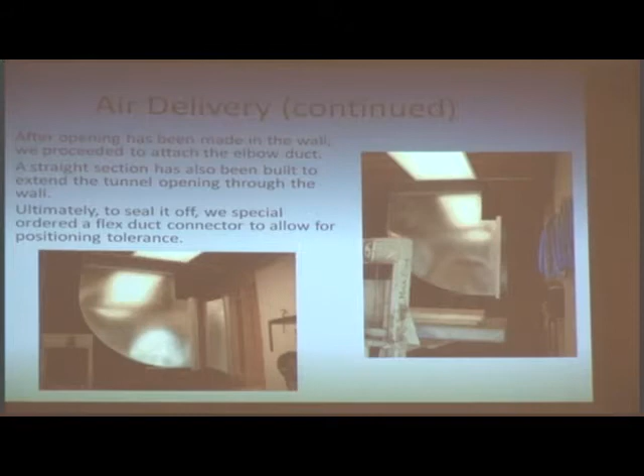Now, after we opened the hole in the wall, we proceeded to attach the elbow duct. This elbow duct was pretty tough to attach. It's heavy, I think it's like 500 pounds, so we had 4 guys holding it up.

We used a jack bolt underneath there to support the weight, and we bolted it in towards the top. Towards the end, to ultimately seal it off, we had the special order flex duct connector. You'll see it right here.

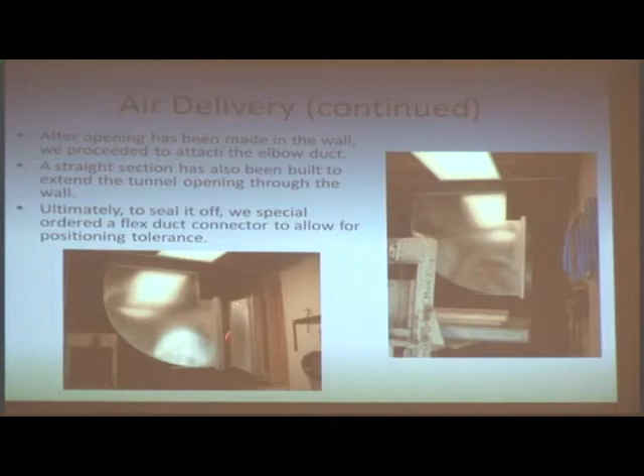That's the flex connector. It allows you to take your original size and expand it to the dimension of that. It also allows for positioning tolerance - basically, you can shift it around and have a little jiggle room to work with.

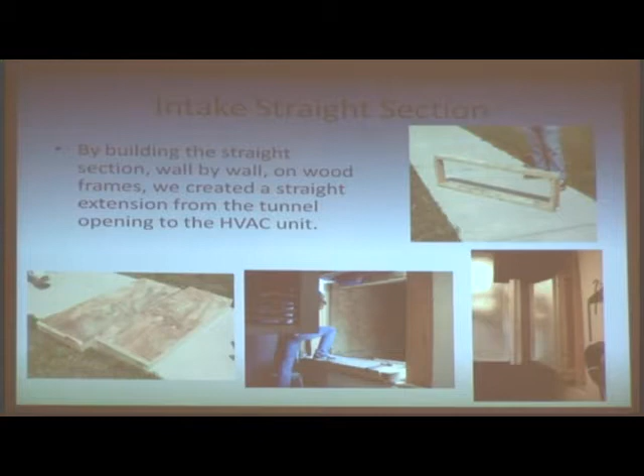Now, the intake straight section. We built the intake straight section by wall on wooden frames. And the wooden frames you'll see right here, we created an extension from the tunnel to the HVAC unit. So we made these walls or these little assemblies, and we have 4 of these.

So we put one here, one here, one here, one here. We'll bolt it up, seal it up with silicone, and once we have that straight section done, we're able to attach this flex connector.

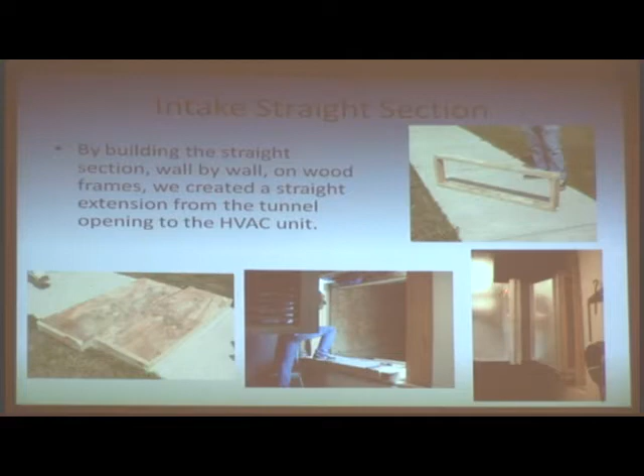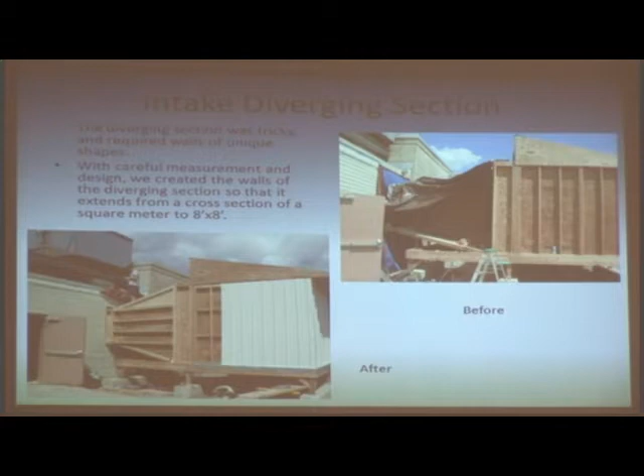Now the intake diverging section. Earlier I was talking about the intake straight section - this is the diverging section that comes right after it. The straight section is right inside this wall. Now the diverging section basically diverges the airflow this way.

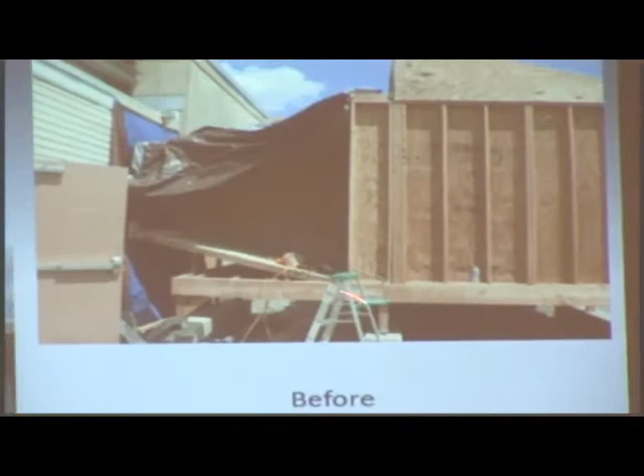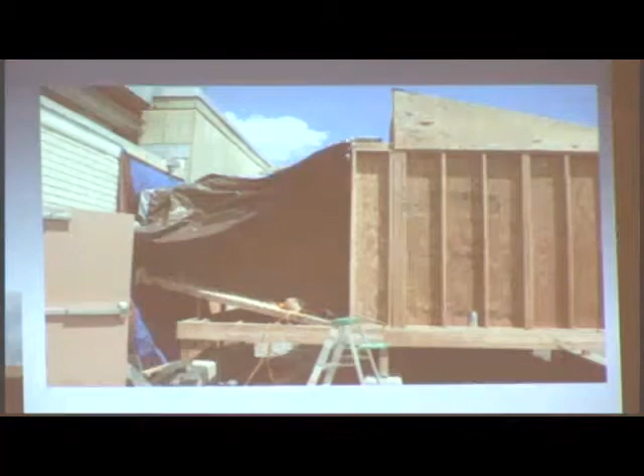It's a little tricky because the walls aren't perfect squares, and we have to cut little triangles matched to the right degree of the right angle. This allowed us to extend from a cross-section of 1 square meter, which was the opening inside here, to an 8x8 opening. I know it's a different change of units, but that's just the way it worked with the HVAC unit and the wood. So we expanded from a square meter to an 8x8 opening.

Now, to turn airflow, I mentioned earlier that we use turning vanes. Whenever the wind tunnel makes a turn, such as at a corner, especially a 90-degree corner, the airflow can get extremely messy and cause a lot of turbulence.

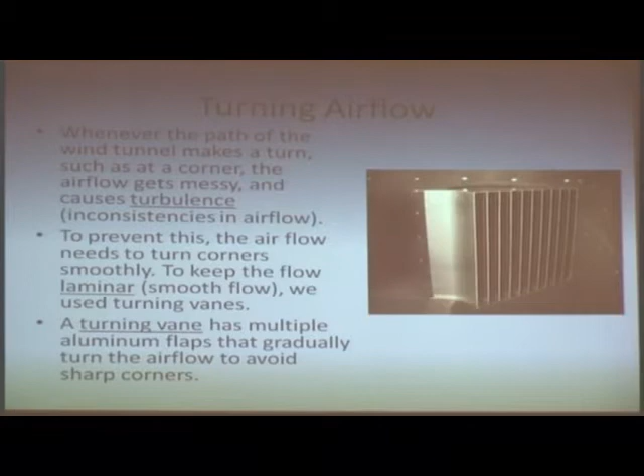That's when the airflow travels along a path, then when it's about to hit a corner, it just bounces off as it tries to turn. That causes a lot of turbulence, and we want to prevent that in order to have smooth flow. We want to turn the corner smoothly and keep the flow laminar - by laminar, that's a vocabulary word meaning smooth flow. To do that, we use turning vanes.

These are turning vanes. They're custom made. These turning vanes have multiple aluminum flaps that gradually - if you see the curve here - gradually turn the airflow to avoid sharp corners.

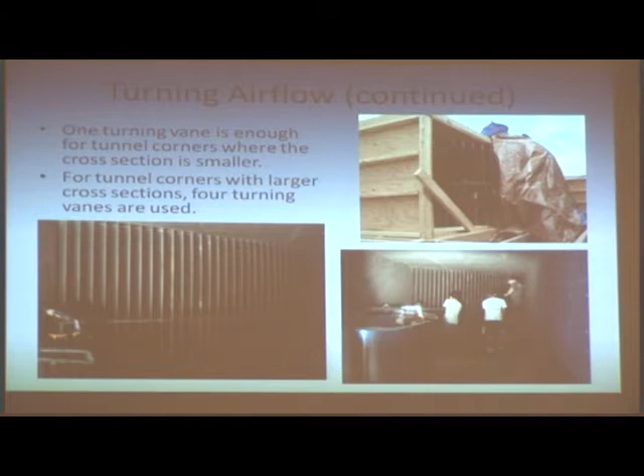Now, this turning vane is used in multiple corners of our wind tunnel. In this case, this is a smaller section of the wind tunnel. We have diverging sections, contracting sections, and certain parts of our tunnel are smaller in cross-section and some are larger. On the smaller contraction, on the smaller tunnels, in the corners, we're able to use only one. That's enough to turn the airflow around.

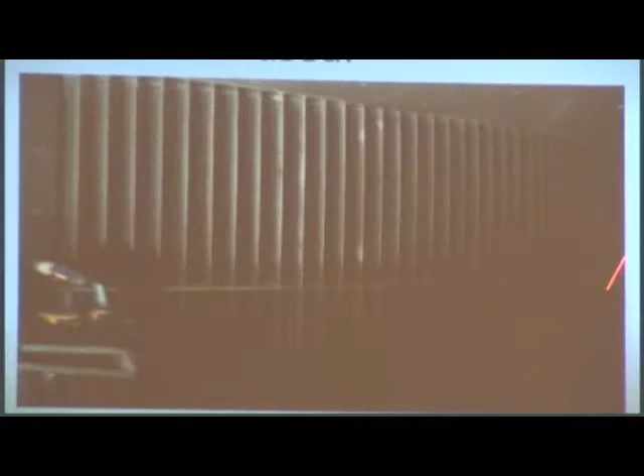Now, in large sections like the 8x8 that I mentioned earlier, we put the turning vanes in a stack of 4. So we have to secure it down with bolts and screws, and that's how we bolt it down.

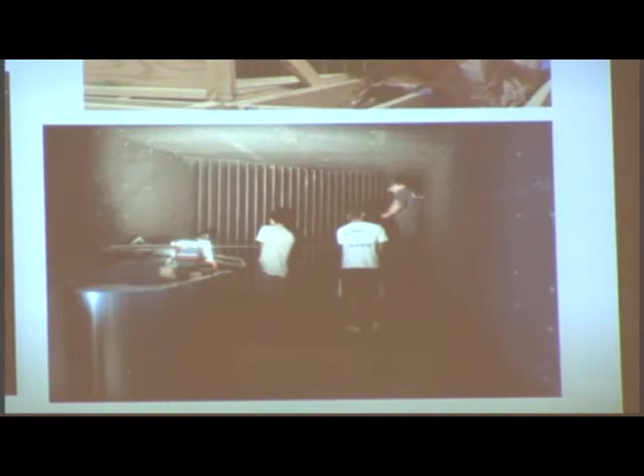Now, one thing about the airflow is that when you're running a test, you want to have clean airflow. You want it to be clean because you want it to be laminar or smooth. In order for it to be laminar, you have to minimize your flow turbulence.

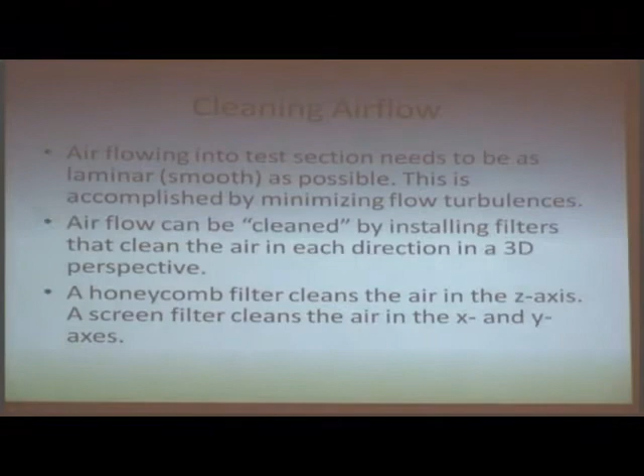You clean this airflow by installing filters that clean the air in each direction in a 3D perspective. By 3D perspective, I mean that if airflow is coming this way, you might have some turbulence that's just floating around, and you want to be able to clean it this way and this way. So you use a honeycomb filter or a screen filter or both. A honeycomb filter cleans the air in the z-axis, while a screen filter cleans the air in the x and y-axis.

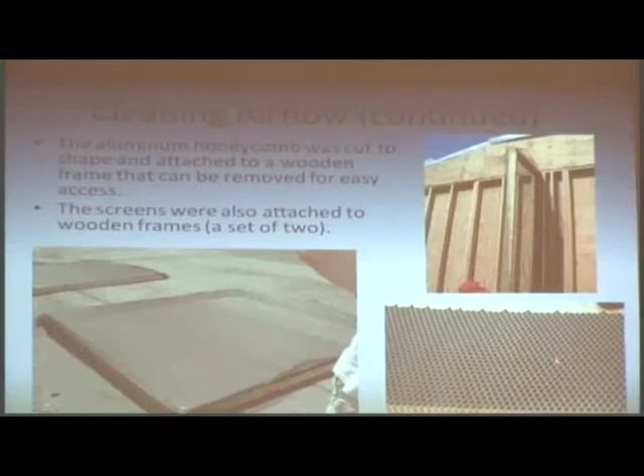Now, cleaning the airflow. I just mentioned honeycomb and screens. A honeycomb is basically an aluminum sheet shaped like a honeycomb, about 5-6 inches thick, and it allows you to put air through it and clean it in a horizontal way.

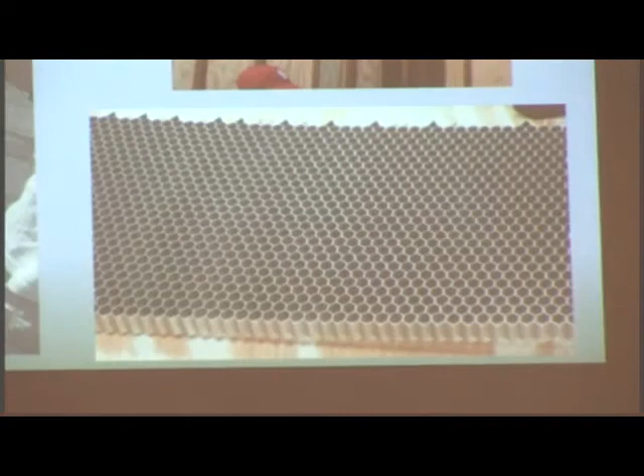The screens are also attached to two frames made together by 2x4 studs, and the honeycomb was also placed on these frames. We were able to slide these into our test section to filter the air before it reaches the test section, before the anechoic wind tunnel chamber.

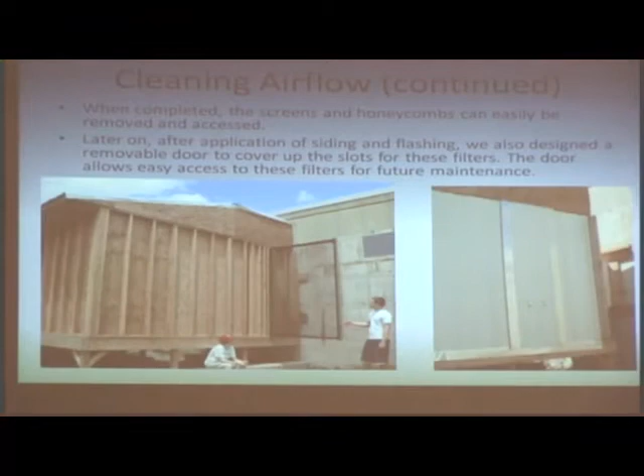Once completed, the screens and honeycombs can be easily removed for maintenance, just by sliding them out. It's a little heavy, but all you have to do is slide it out, change the screens, clean it, whatever you have to do. There's the first screen here, second screen here, and the honeycomb right here. It's a little difficult to see on screen, but it's right there.

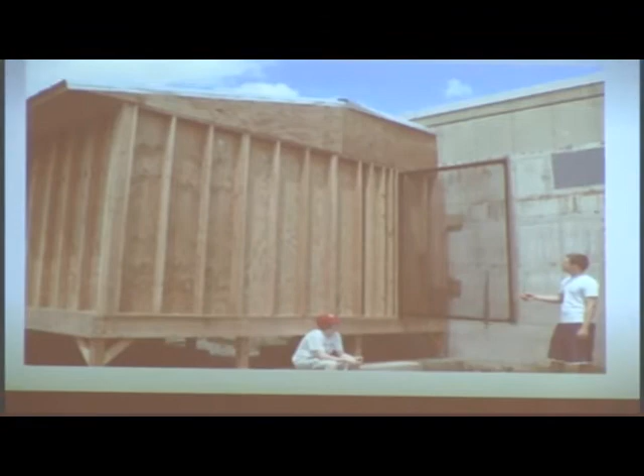Later on, after we put on siding and other stuff like flashing, we made a custom door that allowed us to cover up this hole, which let us waterproof it and protect it from rain and other weather damage. With this door and handles, we can remove it for future maintenance.

For the exhaust section, at the rear end of the wind tunnel, we wanted to design a section that can extend into the fan unit. Earlier I mentioned this is the fan unit - there's a large fan in here and a metal plate here. We wanted to finish extending this inside.

So what we ultimately did was cut it with an abrasive disc and cut a hole in the metal. I don't have any in-progress pictures - I've got to take some - but it ultimately took a few days. The other side is the opening, shown in this picture.

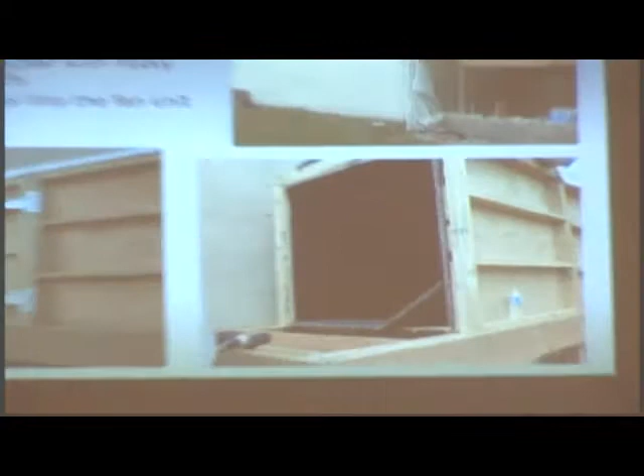Once we completed it, we had a door. We also designed a door that we can just latch, open and close, so we can allow easy access into the fan unit for maintenance.

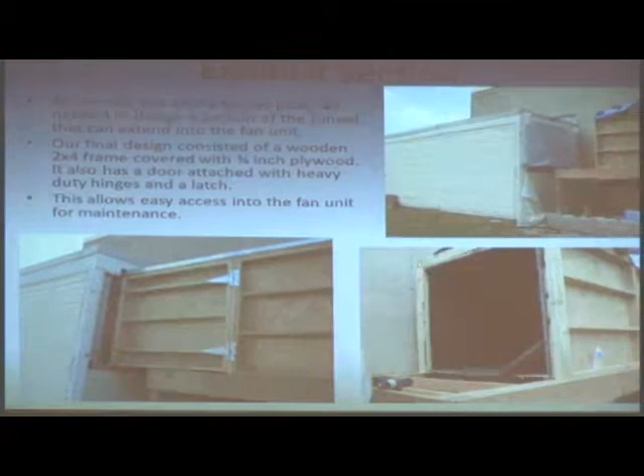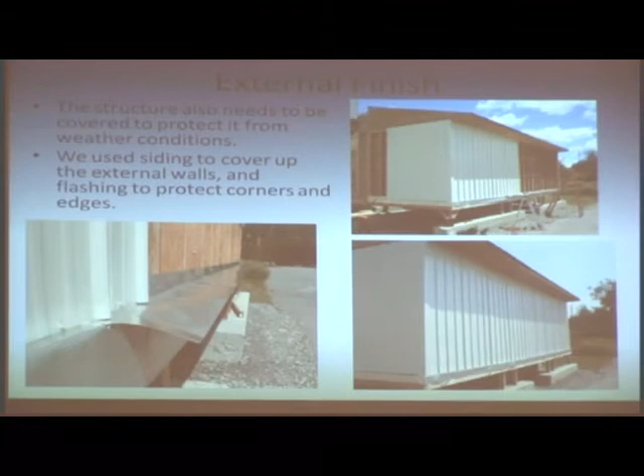Now the external finish. By external finish, I mean protecting the outside structure from weather damage - rain, snow, anything. To do that, we used metal siding to cover the external walls on the outside of the tunnel.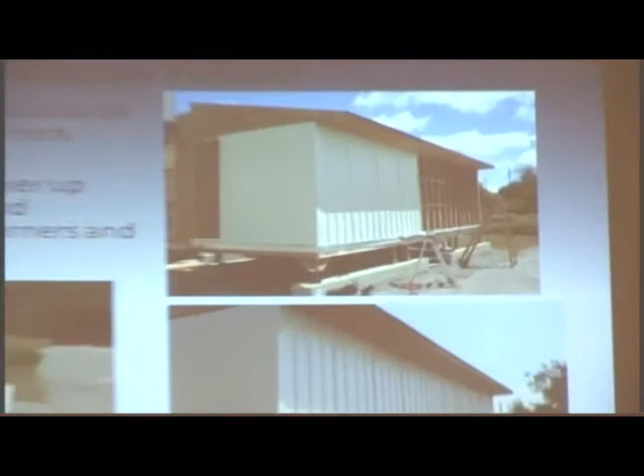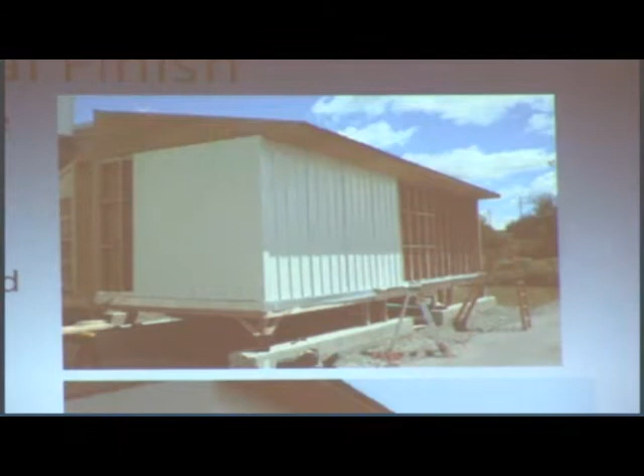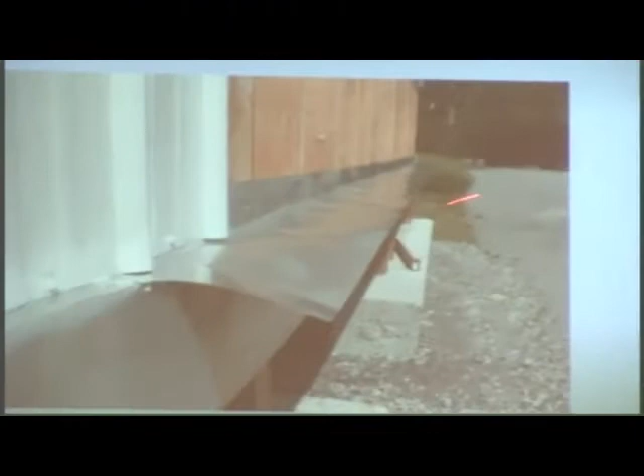These external walls were originally exposed wood, so what we did was add more 2x4 pieces so we could nail or screw the metal siding in. We also used what we call flashing - a metal sheet you can buy in a roll - which we rolled down and bent over to get a nice finish that prevents water from seeping under.

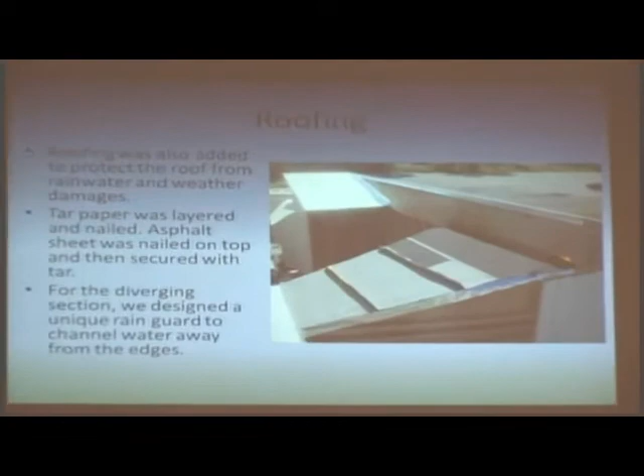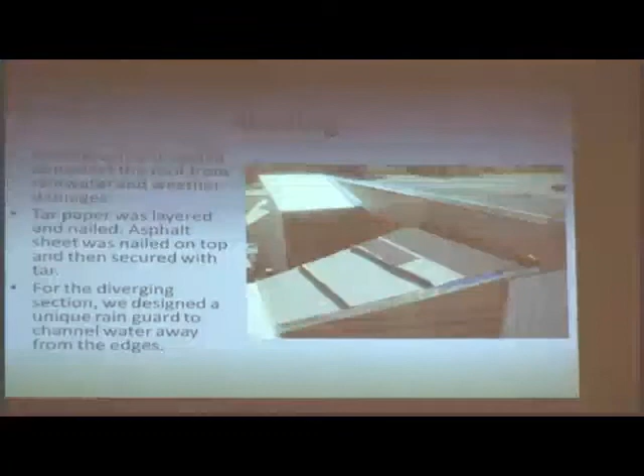We also did roofing on the tunnel. We wanted to add the roof to protect it from rainwater and other water damage. To do that, we laid down a layer of tar paper and nailed it down, then added an asphalt sheet, which is what you see here.

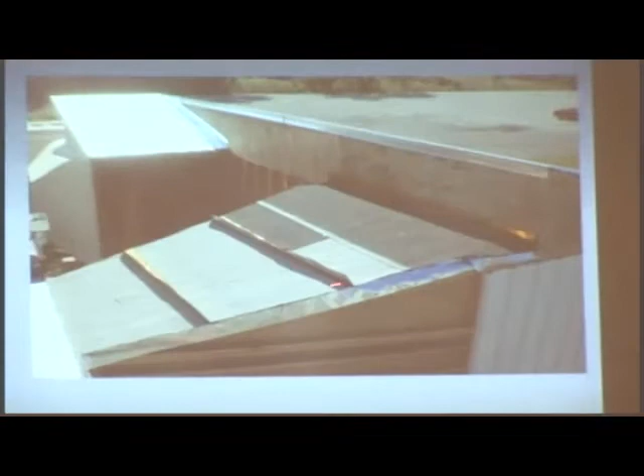So the tar paper is right underneath here, and that was also secured by nails. Then on top, it was secured either by tar on the top or along the edges.

We did this all around the other sections of the wind tunnel, but for this picture I wanted to show you the converging and diverging sections we had earlier - this is where the HVAC unit is and where the elbow goes in. This is how we covered the roof there, and we made custom rain guards that channel the water away from the edges.

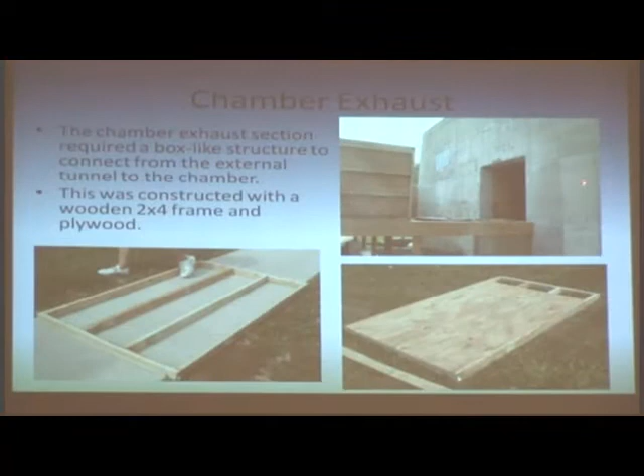Now for the chamber exhaust. The anechoic chamber - this concrete building - the actual facility is inside, and this is the outside.

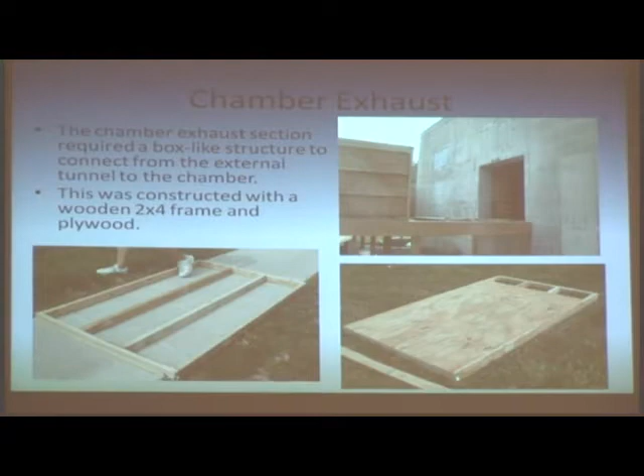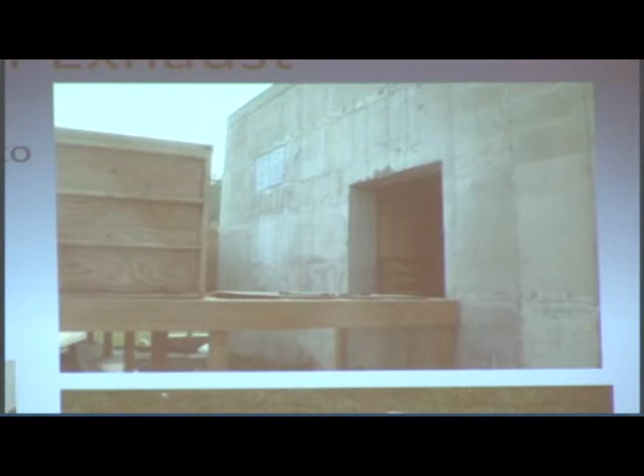This is the exiting hole. In order to channel the airflow through here and around the building toward the other side where the exhaust fan is, we constructed a wooden box out of a 2x4 frame and plywood.

These frames will be placed here with the wood on them, and that will basically create a box.

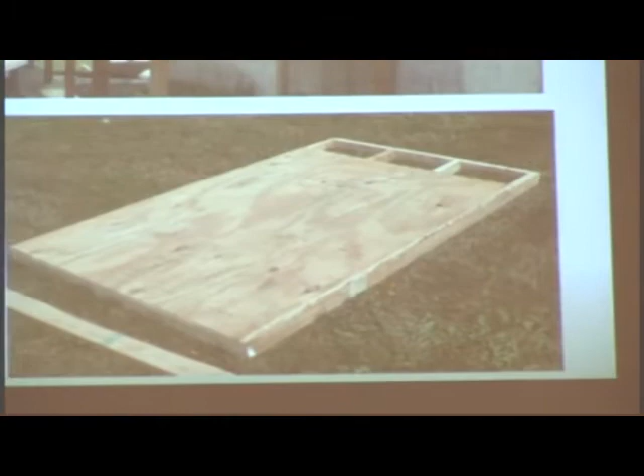Once we installed it, we put the frame in, put the wood in, and secured the bottom with bolts, washers, and nuts, and on top we layered it with our roofing. Finally, it's watertight and water sealed - we sealed the sides with caulking and silicone, and now it's waterproof.

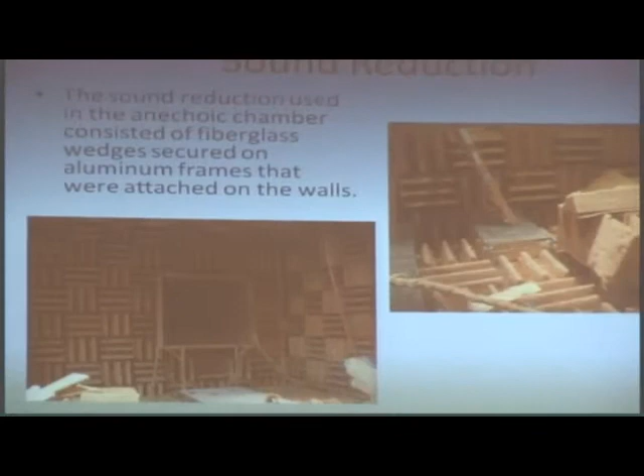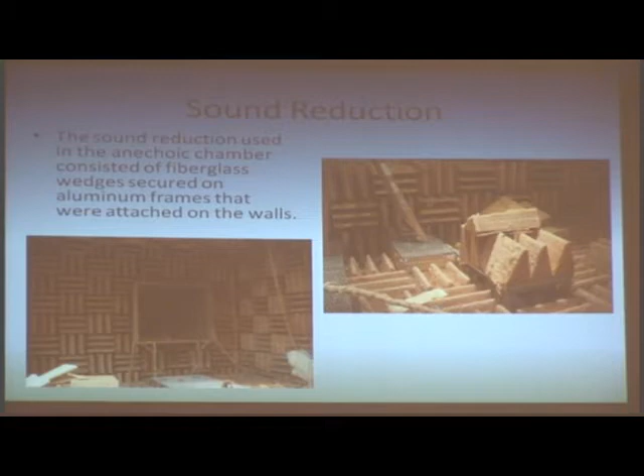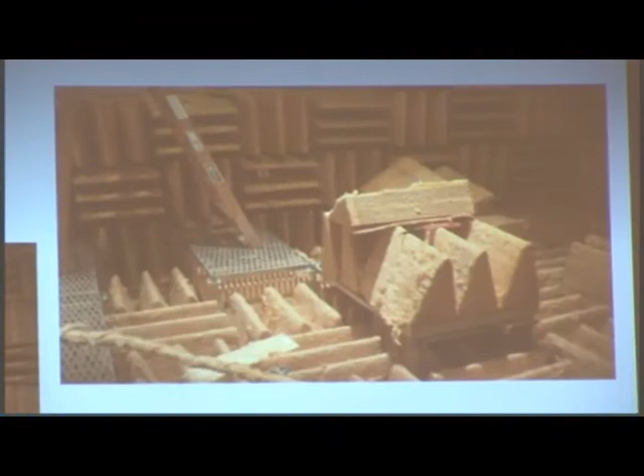Now, sound reduction. Earlier I was talking about the anechoic chamber and how it can reduce a lot of noise. The way it works is that it has these wedges, and in our facility we use fiberglass wedges. They're little wedges with a sheet of thin fiberglass material that folds over it. So you get 3 wedges per aluminum frame, and each aluminum frame is attached onto the wall on aluminum tracks.

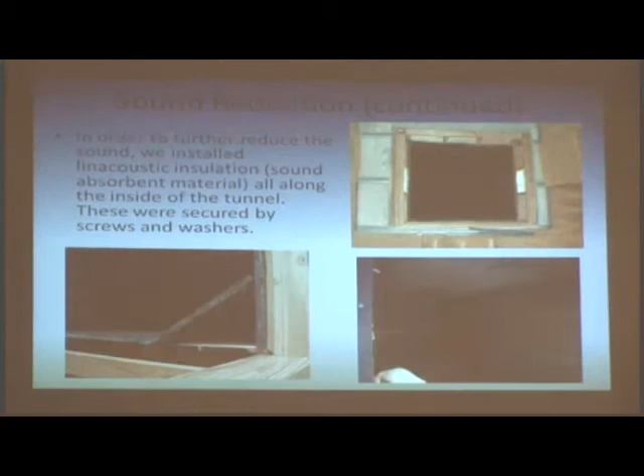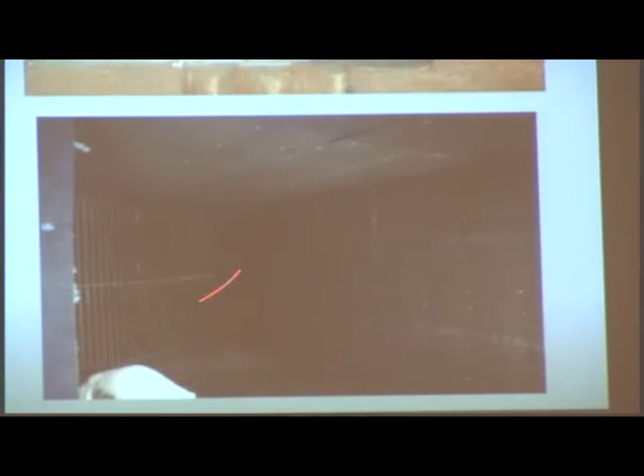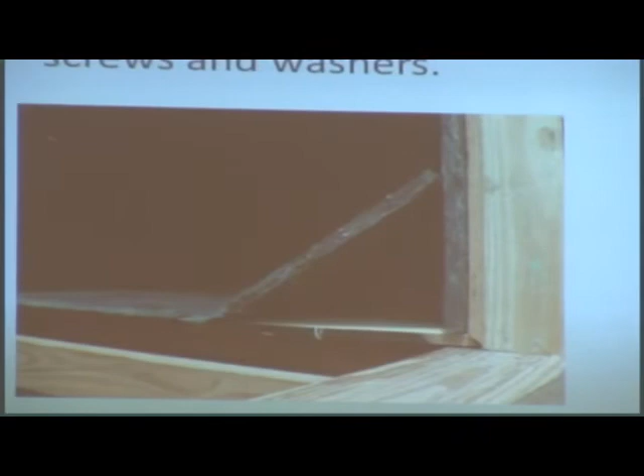Now, for further sound reduction, we also installed Linacoustic insulation, which is basically sound absorbent material all along the inside of the tunnel. You can see here from a previous image the turning vanes, and also the exhaust section I just showed you. There's acoustic insulation all over, designed to absorb any sound that might be created by airflow moving through the tunnel.

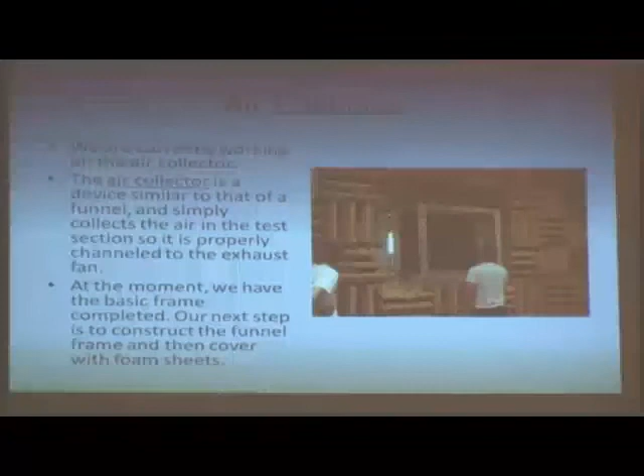Now, currently we're working on the air collector. We've worked on so many projects over the summer and gotten a lot done. As of last week, we've been starting on the air collector, which is a device similar to a funnel. You have airflow coming in, and you want to make sure you're able to extract all the airflow out and eject it from the facility. You do that with a collector. It acts like a funnel.

At the moment, we have the basic frame done. Next week or so, our next step is to construct the funnel. So you're going to have something that opens up this way, and it'll be sort of like a cup or a collector or a catcher that allows you to suck out the air that's coming in.

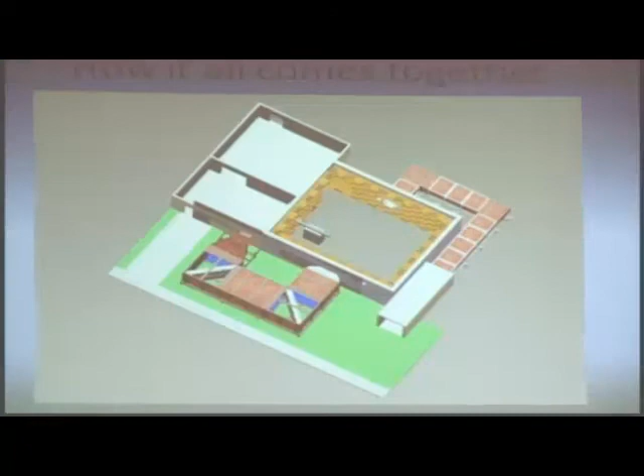This is an image made in SolidWorks by one of our students, and I want to show you how this all comes together. I've shown you pictures of different parts of the tunnel, but here's the overall layout. This is the building where you saw the HVAC unit before and the elbow, and that's where the air comes in, gets redirected into the diverging section. It passes through the diverging section, turns in the turning vane, goes straight, turns again, and goes into the converging section, where it's channeled into a straight section that we're going to build in the near future.

That's going to channel it to our test section, located right here. The collector, we're going to build right here. The air that flows through here is going to be rechanneled through this path. There's a turning vane here, straight path, turning vane, straight path, all the way into our fan exhaust unit.

So one question we might have is, what kind of wind tunnel is it? Well, the way it works is you have air coming in from the atmosphere, and air exhausting into the atmosphere. So this tunnel is actually an open loop tunnel.

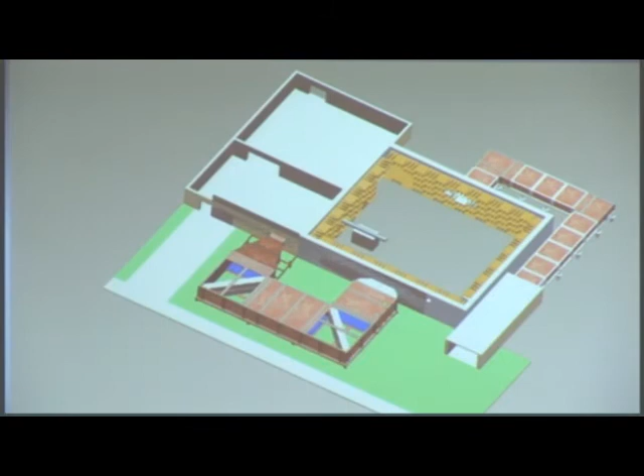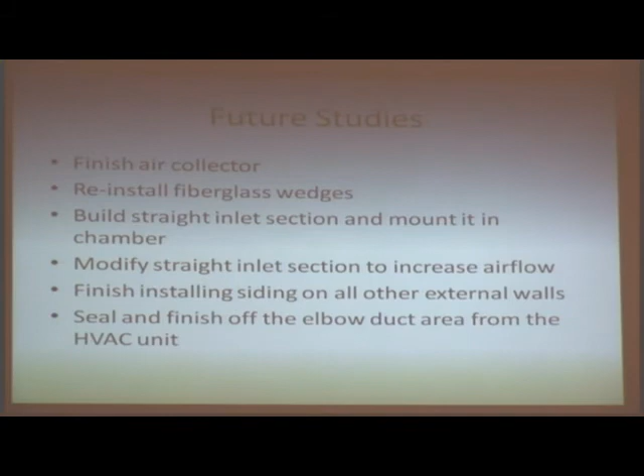So our future studies are to finish this air collector. We have to finish designing it and also finish assembling it within the next 2 weeks. After we finish that, we want to reinstall the fiberglass wedges that we had to remove in order to access the walls of the building.

Then once we finish that, we want to build the straight inlet section, which I just mentioned, down here, and mount it inside the chamber. Then once we do that, we want to modify the straight inlet section so we can increase the airflow.

The reason is because we ran a simple test and studied the actual velocity coming out of the wind tunnel. We achieved 6.5 meters per second. We needed 5 meters per second, but we're aiming for 10 to 15, so it's a little slower than expected. In order to increase speed, one alternative we came up with is to modify the inlet straight section so you can minimize your cross-section and increase your airflow.

Now we also want to finish installing the siding on the other external walls, as well as flashing and the roofing that we might have missed. Then we're going to seal off and finish the elbow duct area in the HVAC unit. That's where the elbow duct was earlier, and we want to seal it off so it looks nice and presentable.